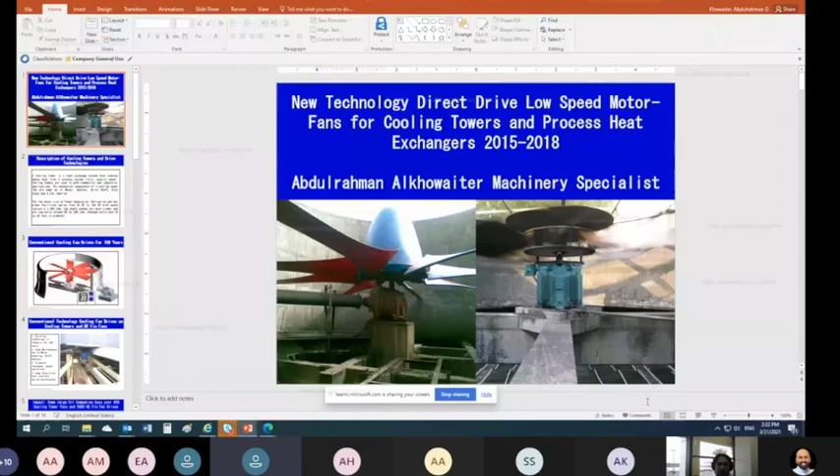I will share this on our screen if I can find the share option. Okay, there's sharing and screen share. Share your screen. Yes, should I share? I don't know, is it working? I don't think it's sharing yet. Once you click share, you're supposed to click desktop or window. Okay, here we go, finally. Okay, I'm seeing you. Okay, alright, there we go. Okay, let me pull it out full. Is it clear now? Yes. Okay, I don't know if I can move this down.

So this is the typical technology: on the left-hand side is a motor-driven fan, motor with a long drive shaft, but you don't see the motor here. Then you have a gearbox, then you have a fan - this is a cooling tower fan. And here's the new technology, which is much better: it's a direct-driven, special-made motor that is made to live inside these water cooling towers. By the way, it's almost waterproof, designed to live continuously in this environment, and there's no more shaft going back to a motor outside.

So you eliminated the motor, the drive shaft, and the gearbox. Well, you still have a motor, but it's a large, low-speed direct drive motor that drives the hubs directly. So we eliminated the gearbox and the drive shaft, and the small motor's gone. Now we have a large motor.

This is not exactly what he was discussing. He was discussing more the fin fans. But this is the one we just talked about. This is the old technology, motor outside, then a long shaft, gearbox, and fans.

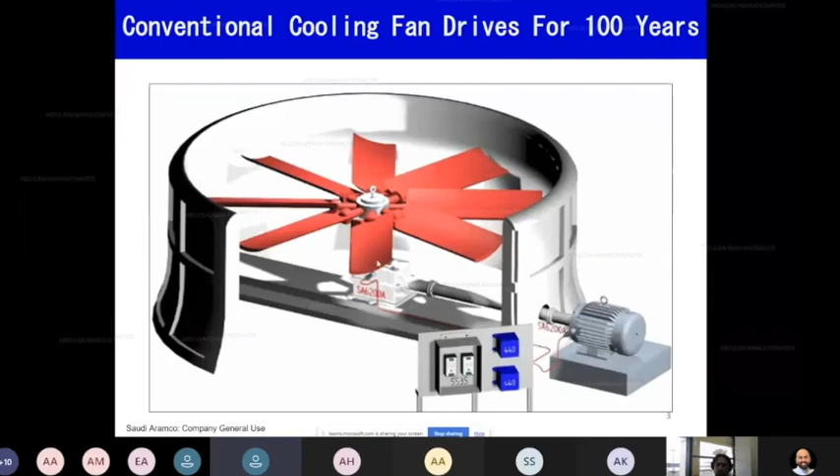And we are going toward this, and this is again a situation. The other situation is fin fans. Here's the belted drive. I believe Mr. Feiruz was discussing this.

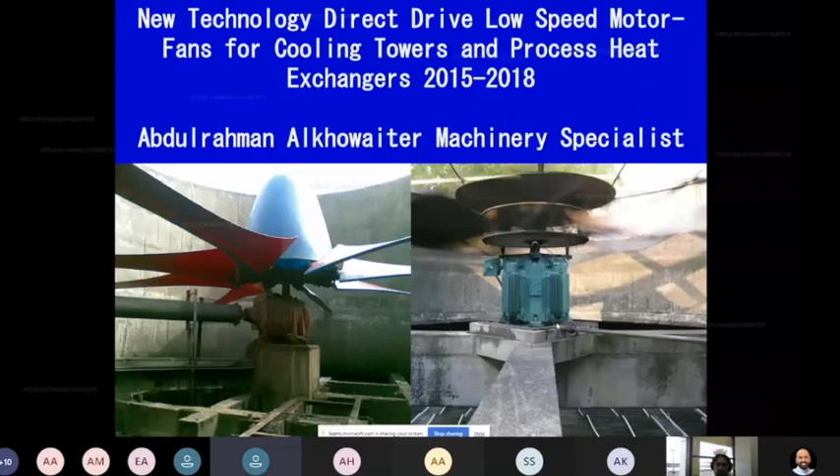Can we add a magnetic coupling to this drive here? Instead of this technology, which is direct drive, which also works, he wants to use this technology.

Yes, it's possible. You'd put here a sheave, but it has to have a second or third bearing out here to support this sheave, because it's going to be a magnetic sheave with a magnetic pulley on it, and then you would have adjustable speed. That would then connect to the same old pulley.

So the rest of your infrastructure would stay the same, but this side has to be modified. It's possible you could probably use the same motors, but you have to add this special sheave with a special bearing support for it somehow. That has to be added over here. So is it possible? Yes, you could.

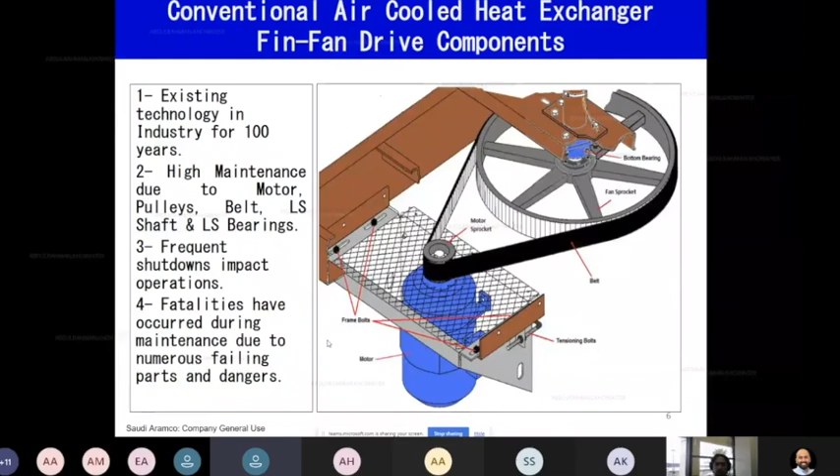And that's most of the costs. It's not so much the VFD motor, but the whole connection and the expense of that becomes too expensive. So definitely a magnetic coupling here could work. Yes, it's possible, or if possible, go straight to a direct drive motor.

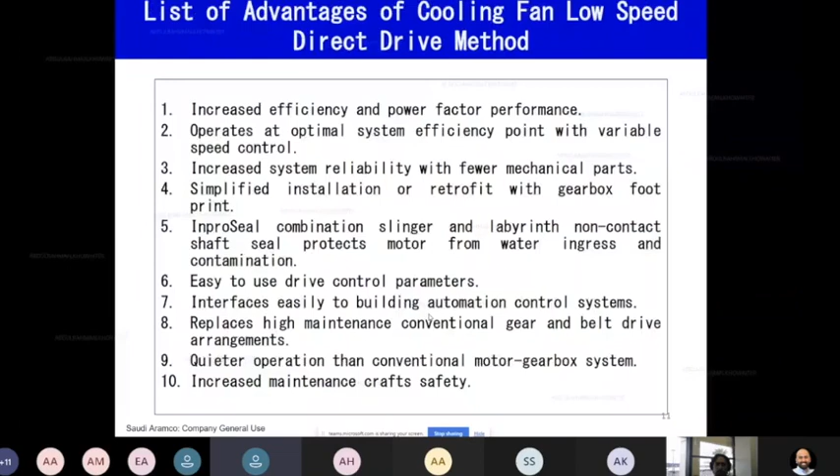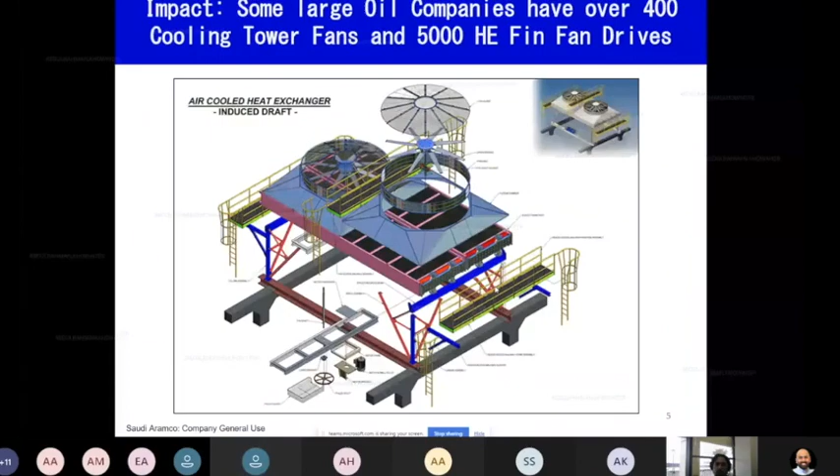So you eliminate the previous connections here, all of these, the low speed shaft and these pulleys and everything, and you jump straight and put in this low speed motor up here, directly driving the fan, but only in forced draft application, not in induced draft. We cannot do it with a low speed shaft in induced draft because you cannot put a low speed bearing motor here, then have a long shaft on top.

It doesn't work really properly well. You still end up having a bearing up there. I guess you could, but it's not really recommended. This is the easier, more recommended approach.